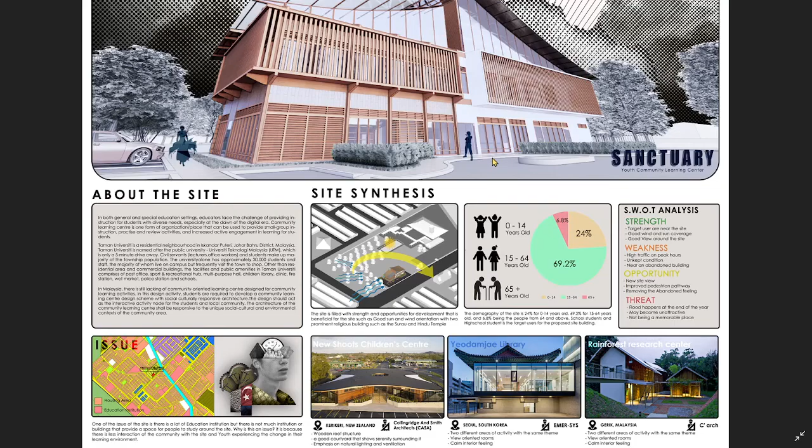To start it off, we'll go to my site synthesis. The site is filled with strengths and opportunities for development that is beneficial for the site, such as good sun and wind orientation, with two prominent religious buildings, such as the Surau and Hindu temple.

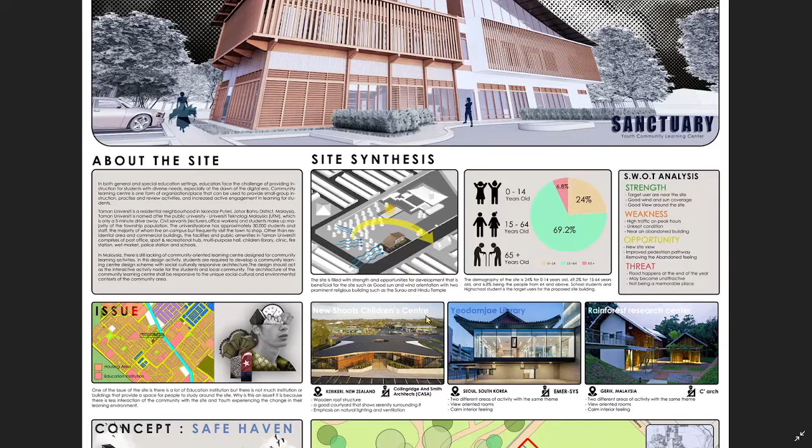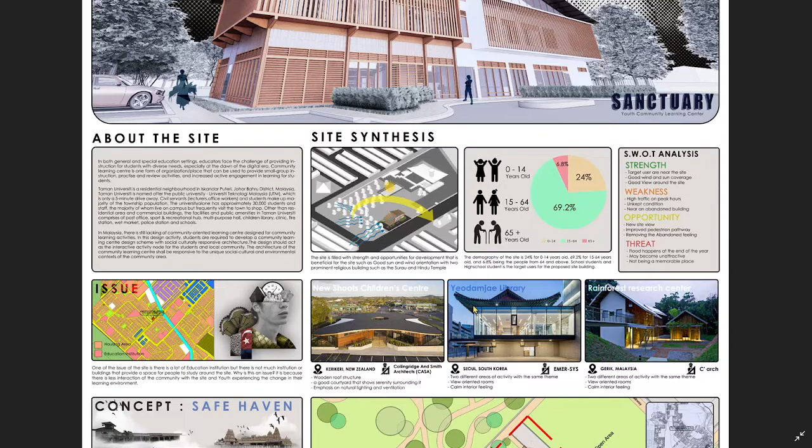The demography of the site is 24% for 0 to 14 years old, 69.2% for 15 to 64 years old, and 6.8% being the people from 64 and above. School students and high school students are the target users for the proposed site building.

Next, I'll go through my precedent study. One of the precedent studies is New Shoots Children's Center, which I referred to for their emphasis on natural lighting and ventilation. Next is Yeodamjae Library, where I refer to their view-oriented rooms. The last one being the Rainforest Research Center, where I referred to their two different areas of activity with the same theme.

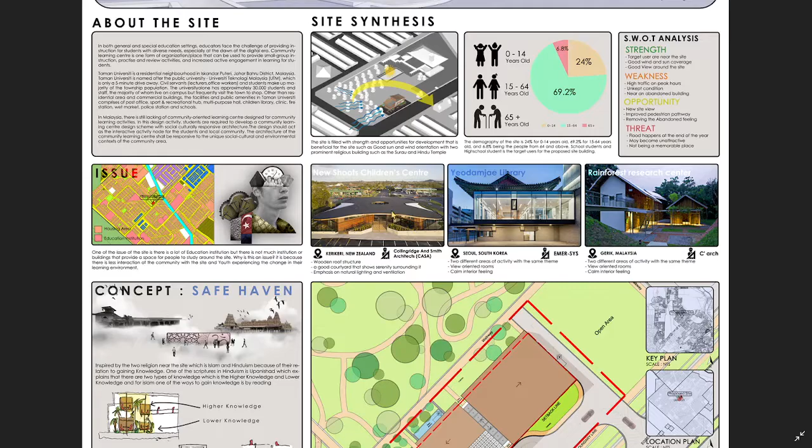Now we'll move on to the issue of the site. One of the issues is there is a lot of educational institutions, but there is not much institution or buildings that provide a space for people to study around the site.

Why is this an issue? It is because there is still a lot of youth experiencing change in their learning environment, and there is less interaction of the community with the site.

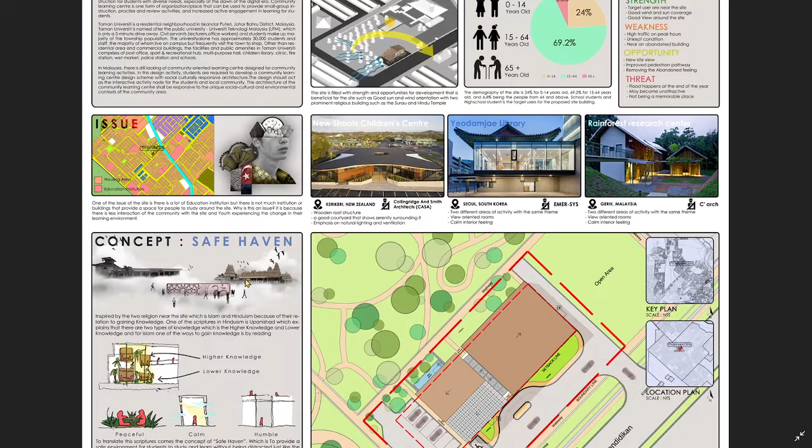To solve this issue comes the concept of safe haven. It is inspired by the two religions near the site, which is Islam and Hinduism, because of their relation to gaining knowledge. One of the scriptures in Hinduism is Upanishad, which explains that there are two types of knowledge: higher knowledge and lower knowledge. And for Islam, one of the ways to gain knowledge is by reading.

To explain further, this building is to provide a safe environment for students to study and learn without being distracted, just like the two religious buildings' atmosphere and feel of the building.

Using the Hinduism aspect of knowledge, that is Upanishad, the building will be made with two levels of the same activity, but going up as the higher knowledge and lower knowledge.

As for the Islam aspect, it will be shown through the elements of Islamic architecture by the keywords peaceful, calm, and humble, just like the Wakaf.

Back in the day, the Tahfiz used to learn only at the Wakaf for their general knowledge of Islam. So this is one way of me trying to make a more modern type of Wakaf.

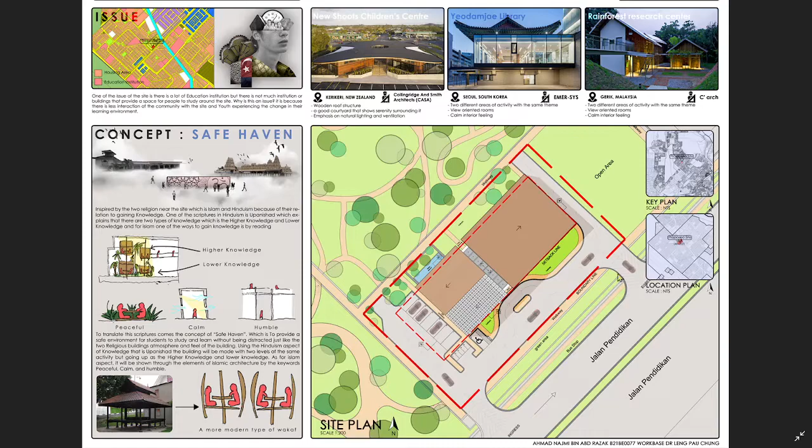Now we'll go to my site plan. Here is the ingress of the building, the parkings, motorcycle parkings, the OKU parking, the drop-off, and the services lane. And here is the address of my building.

Now we'll move on to the ground floor plan. So one of the activities in my ground floor plan is the indoor reading area, the outdoor reading area, the cafe, and the multipurpose hall.

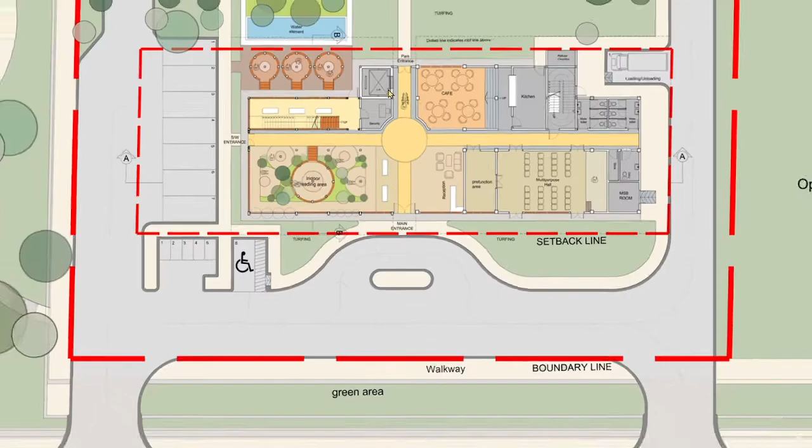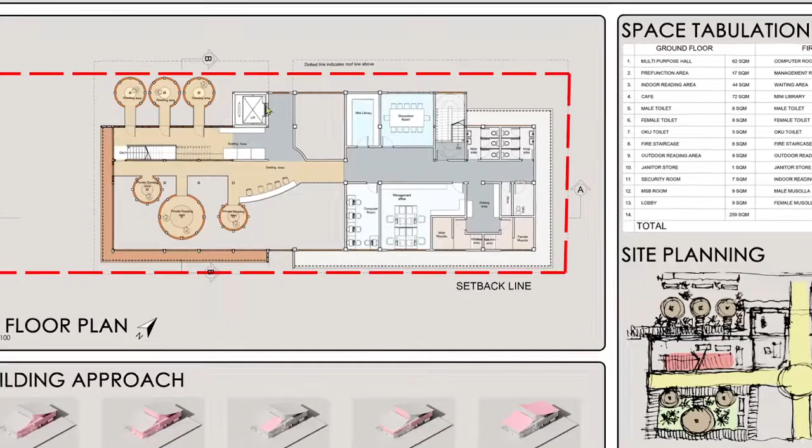Okay, now we'll go to the space tabulation. So for the ground floor, there is 259 square meters for the area, and for the first floor there is 185 square meters, which in total being 444 square meters for the whole build up area.

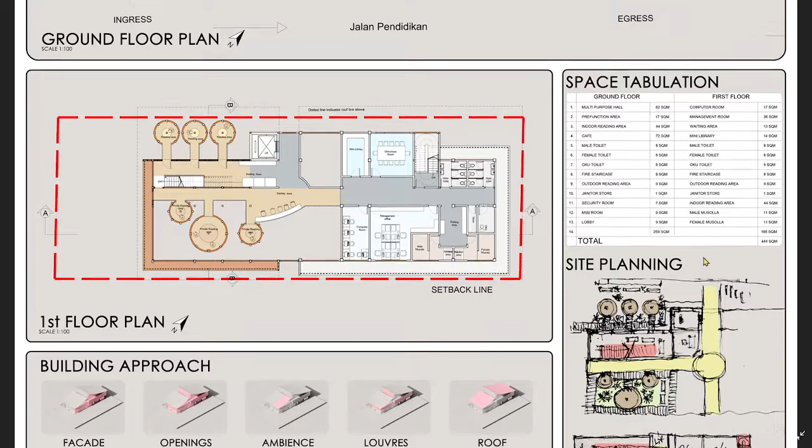Now for the building approach, we have the facade. The facade of the building is facing the main road, which is here, to maximize the view by having a more interesting design. Next is the openings.

The openings focus more on the facade of the building for natural lighting and ventilation based on the site synthesis. Next one is ambience: natural lighting to create an ambience by following the concept of peacefulness of the user's experience, which is on the indoor learning area.

Next one is the louvers. Sun shading by using louvers to cover up the first floor of the building to reduce the sun rays coming in. And last one is the roof.

By using a curved structure for the roof, it gives a softer look to the form, changing the shape from being bulky. Now for the form development.

I started with a simple block on the side, then separated the blocks by dividing it into two. Then I divided one of the blocks into two different spaces, then added a curved roof to change the shape outlook, and finally refined the shapes into the final form of the design.

Next we'll go to the site planning. Here we can see that I tried to create three entrances for the building to give it a more welcoming feeling than just entering by one area of the building.

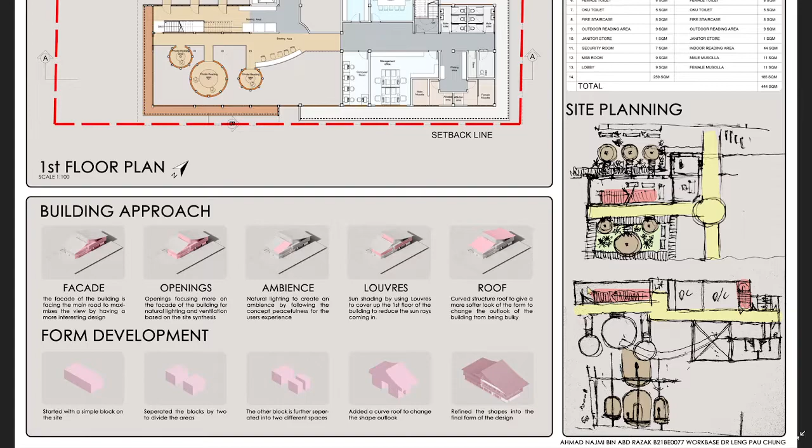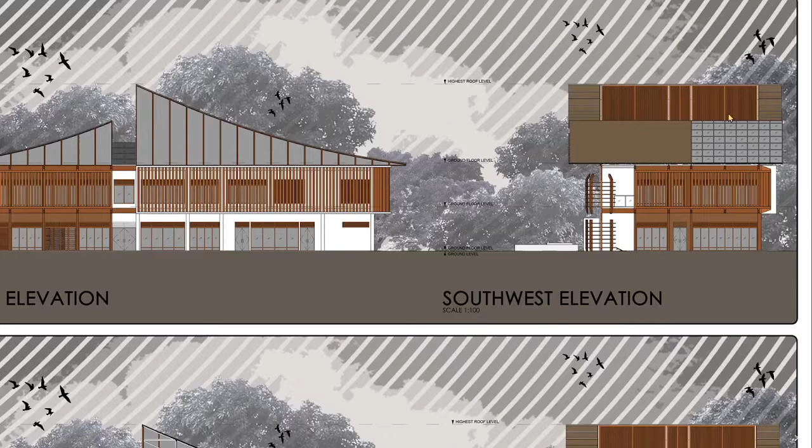Next is the southwest elevation. Here is the indoor reading area skylight and the outdoor reading area placement.

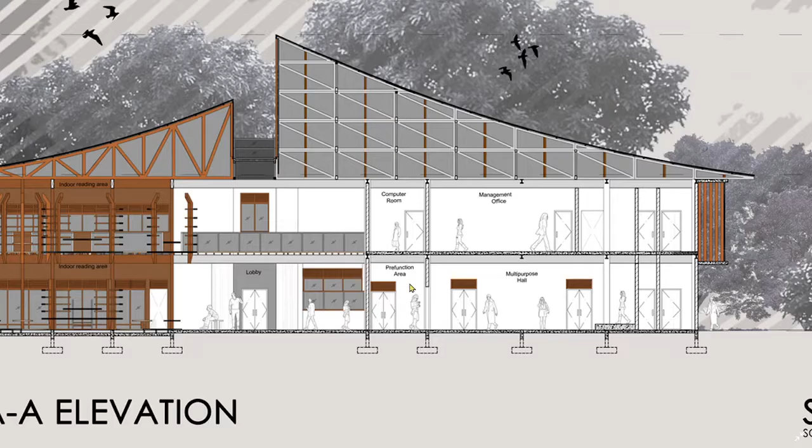Moving on to the section. Here we have the indoor reading area, the lobby, the computer room, the management office, the pre-function area, and the multipurpose hall. Now we go to section BB.

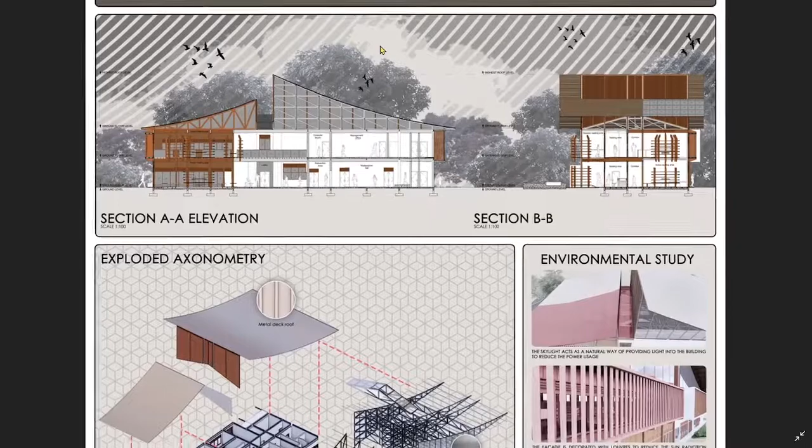Next is the exploded axonometry. For my building, I decided I want the roof to be a metal deck roof. For the structures, on the left side of my building I will be using the timber wall, the more conventional timber wall structure. On the right side of my building, I will be using a steel structure with concrete as the wall.

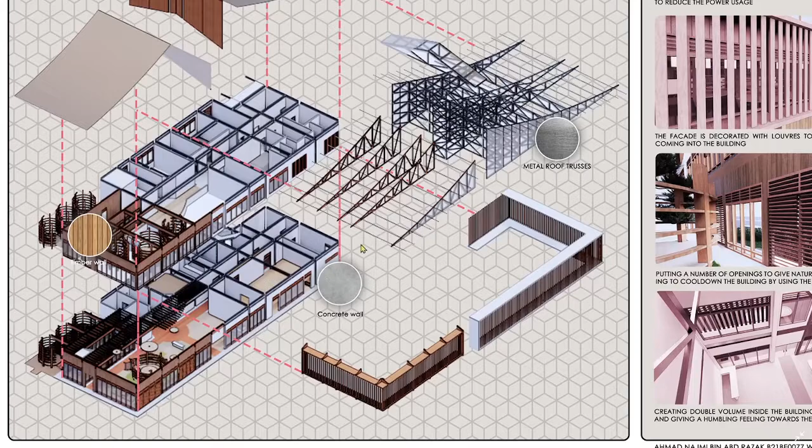Here is the metal roof trusses. And here is the timber trusses with their louvers.

Now we go to the environmental study. The skylight acts as a natural way of providing light into the building to reduce power usage, which is right here.

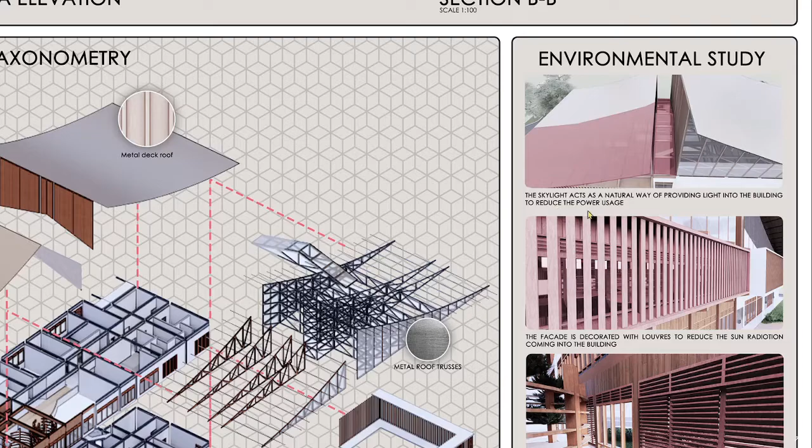The facade is decorated with louvers to reduce sun radiation coming into the building. These are the louvers. And by putting a number of openings, it gives natural ventilation for the building to cool down using a cross ventilation method. So here is the louvers that is mentioned.

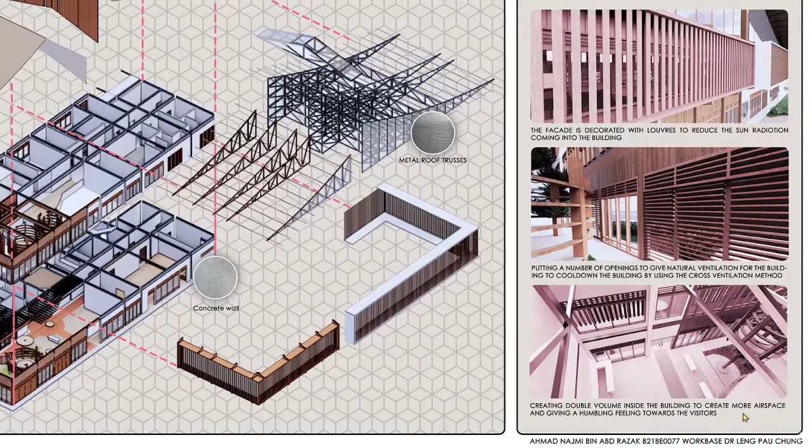Next is creating a double volume inside the building to create more airspace and give a humbling feeling towards the visitors. So here is the view from the roof of how high my double volume is.

Okay, now we'll move on to my sections. Here is my typical section.

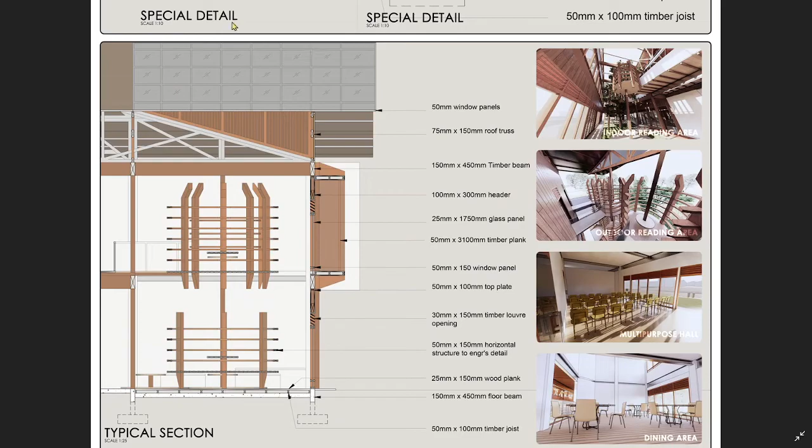Now we'll move on to the special detail. Here's the structure of my wall, one part of my wall, which is right here. I have the timber beam, wood plank, header, and timber louver opening.

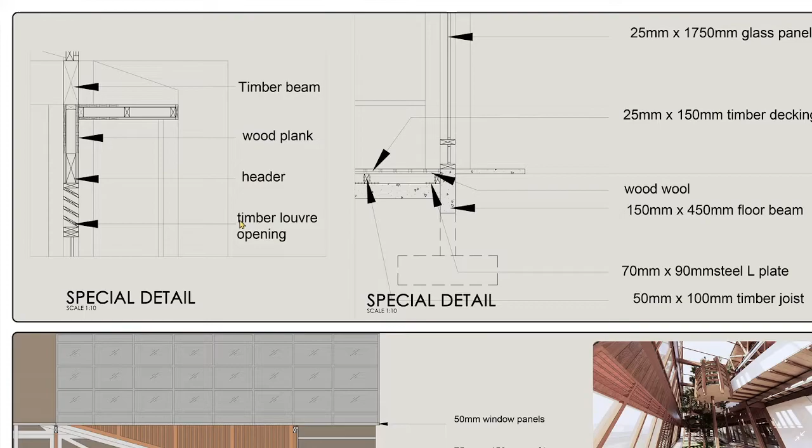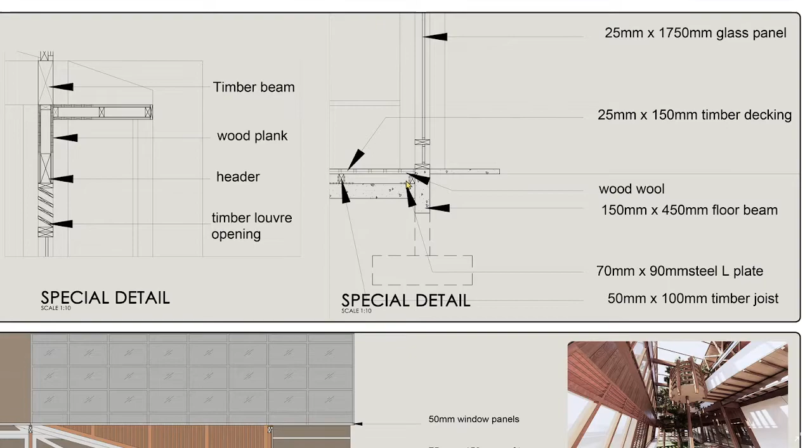Another special detail is my foundation part. Here is the glass panel, the timber decking, the wood wool, the floor beam, the L plate to support the joist, and here is the joist.

Okay, here are some of the views inside my building. So here is the indoor reading area, the outdoor reading area, the multipurpose hall, and the dining area.

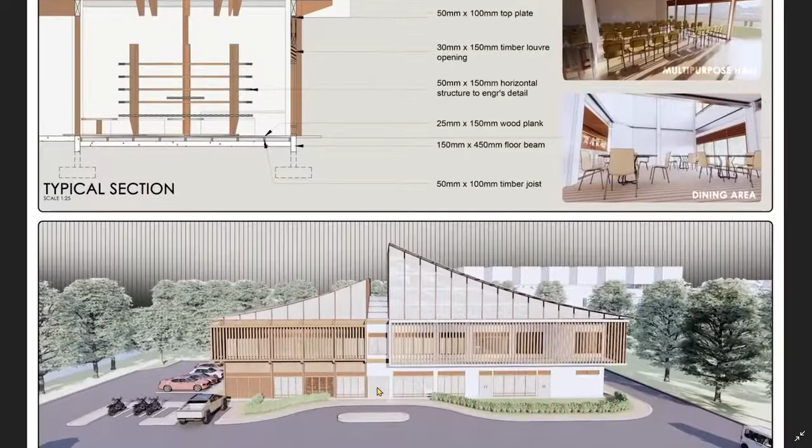And lastly is a whole outlook of my building from the front road.